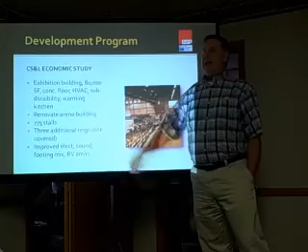So the analysis phase, if you'll go through this. We started with the economic study, as you recall, an 80,000 square foot concrete floor exhibition building, pretty large building. We need to renovate the existing arena building and have at least 775 stalls available for a typical large horse show. The Morgan Horse Show is an exception, since in previous years they've had 1,400 stalls. This year they've got 1,300 stalls, deciding to make it a little smaller by design.

We need to add three additional rings on top of the existing ones, one of them being a covered ring, and we need to make several infrastructure improvements. As you know, the whole site is very old and needs a lot of work.

Another thing the study said was that in 2005, direct annual spending in this area because of the annual events here will grow from $15.5 million to $35 million. Local hotel tax revenue, more than twice as much, from $67,000 to $140,000, and state revenue tax should grow from $490,000 to $1 million.

What is direct spending on? People buying food, gas, lodging, shopping downtown—just where they're actually spending money. There's also some indirect spending left out of that; that's just the direct figure. This building is going to be on the other side across the path. Yeah, we'll get to that. I want to try to get through all the analysis part quickly here.

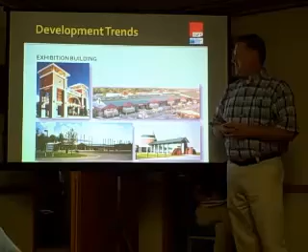Of course, we're in a floodplain, I don't know how good it is. You might have some coastal issues that bring people inland for emergencies from a hurricane or something like that. And once the water goes away, then you can bring them in.

Another one: they're multi-purpose barns, and they're multi-purpose because the trend we're seeing is that portable stalling systems, not permanent stalling systems, are going in. It gives the grounds the most flexibility.

In fact, here, which is very typical, they would remove all of the stalling in all of the barns, stack up the materials, and then in the winter sell that space to store RVs, campers, and boats and things like that, and have an income for a period during snow and inclement weather that they normally would not be able to use the spaces for. So it's a good money generator.

Let's go to the next one. Another thing we see is theming up the entire grounds, especially creating some kind of gate-like entrances to identify where people are supposed to flow into the site. And some identifying markers that create a theme or an image for the site, like the use of towers somewhere to either draw people to it or make the site visible from a long distance.

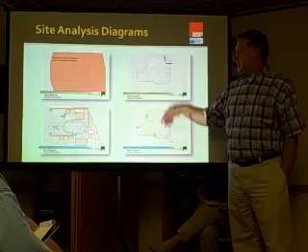How the site functions with the fair and without the fair, in terms of people getting on and into the site, pedestrians, cars, parking, and how they flow once they get on the site. How do you service it once it's loaded up?

What's the existing design alignment of it? What do the buildings look like? What are the fair use zones?

And then what are the multiple non-fair uses, the Paradise City Arts Festival, where do people go, park, shows exist, how does the New England Morgan Horse Show set up?

And then what are the opportunities, strengths and issues of the site? There are several, but among them are that the site floods, and stormwater management is a big issue. The whole site is very old and deteriorating, and has had deferred maintenance for a long time.

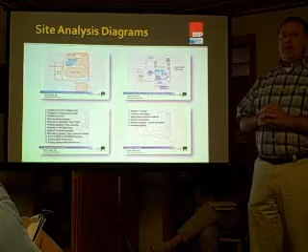And there are some code issues, and it's tough to get to the site if you don't know where you're going, because the signage is lacking, although you can see the site from the interstate.

So what we did was, as I told you, we went away and developed a bunch of alternatives, and came and presented those to the development group and the fair board. In these alternatives we took each one, analyzed it, wrote down the pros and cons, and showed how each could be used. What both agreed to was this alternative 3.

This is not the final master plan, but in this plan the exhibition building is over here by the interstate. What we were asked to do was look at moving that building down this way, because we have a large area that could be developed as a parking lot.

One of the things we looked at was how parking works and where people can get into the buildings. What we're talking about is just right up here by this building. So let's go to the next image.

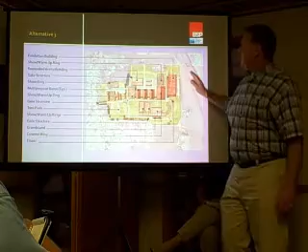With Route 9 and that—could you orient us on that? Yes, I'm sorry, I apologize, I should have done that. Here's the interstate, here is Route 9 coming in, this is Old Ferry Road, this is Fair Street, this is the administration building where we are, and this is the existing arena building.

Okay, all right, so let's move on because this was just one step. Some people just got in here. Can we just see the map for a second more?

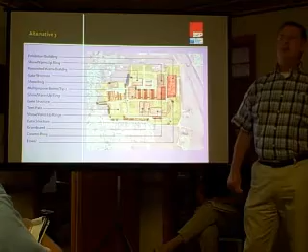More over there? There's a chair here. We got a couple of seats over here. There's one over here now. Plenty over there though, a couple over here. Move, you can almost see. Sorry, we've been doing that all night. You want to sit over here?

If we had used the exhibition building, it does have meeting space in it, bigger than this, that the Morgan Horse folks would not be using at the moment, so this could have worked. It was tough getting it.

All right, so we went back home with the instructions to improve that plan I just showed you. There were reasons why they didn't like the other plan. So we said, well, we'll try and solve those problems and make sure we've done our job completely. So let's go to that.

So we took that plan and shifted it down as we were instructed to, and looked at redeveloping it. We looked at placing the building over to the west side, keeping the red stripe zone that you see there as a parking area that also is where the carnival sets up during the fair.

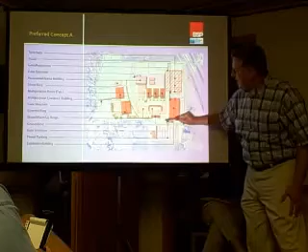I'm going to show you a 3D view of the site, so it'll make a little more sense when I get to that. I just like to tease you a lot while I'm doing this.

So what we were instructed to do with this plan was go refine the master plan. There were some things architecturally we wanted to do to the building, so we went ahead and took it. We'll go ahead and move on to the actual master plan. This is it—it's almost identical, with some minor revisions, but this is the way it generally lays out.

Improve 3 lanes along this road. The existing gate remains that goes in past the arena building. There's a gate here, but we developed a new gate structure and restroom building that provides a main pedestrian spine through the site. We have an exhibition building here, paved parking here, gravel lot here, and reorganized rings for the new grandstand. Is the old grandstand being torn down? Yes, and I'll just go ahead and talk about that.

The existing old grandstand is basically an original grandstand that was moved to the side, was rotting, was rebuilt, added to on both sides, a new roof was put on it, and it just kept being cobbled together. Right now it is so far from meeting any type of fire safety code or ADA code that it would be cheaper just to rebuild a new one under new guidelines.

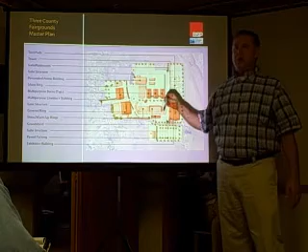So we have 3 new horse barn structures. We've identified, because part of the program for the fair was to say that they could set up 175 or more stalls, but that they wanted to have permanent buildings that could hold at least 550 stalls. So we have 3 100-stall barns that have wash racks, restrooms, and office space in them.

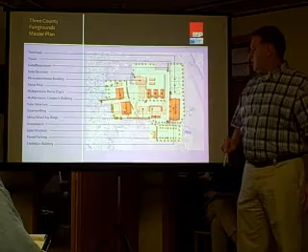We have 1 large multi-purpose livestock building that replaces all that old dairy barn stuff that's very inefficient and dangerous. We have a covered ring that has bleacher seating, and then it has restrooms and concession space underneath it. We have various rings scattered around that sometimes are warm-up rings, sometimes they are actually show rings, depending on who's using them and what they want them for. Of course, the existing arena building and the existing 2 Morgan horse barns, and the existing maintenance building.

You said they needed 550 and you have 300 in those 3 buildings? I have 300 here, about 220 to 230 over here, and then we can install in a couple of these other buildings if we need to. We exceeded the requirements for a permanent building, and when you put in the 3 barns, you can get almost a little over 800 on site. Now the Morgan Horse people need 1,400, and we did a special layout for them to show them where they could put tents. We'll get to that in just a minute.

There's a pedestrian gate that's used only during the fair here, but we propose improving it, putting a nice gate structure in there. So we have a gate structure here, here, here, and here.

Where would the amusement company be? They would set up on this gravel lot. They would be in the parking back. Yes, and I'll show you that in just a minute. I'm gonna get to that.

The 3 rings, you said there were 3. Oh, 3 new rings. Right. They wanted to increase the rings from 5 to 8. There are 8 shown on here. There's 1, which is existing ring building, 2, the covered ring, 1 which needed to be covered. So here's that. 3, 4, 5, 6, now 7, and I missed one.

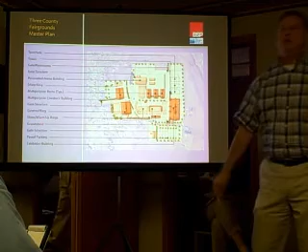Dressage. Thank you. Okay. Yes, sir. So that pedestrian gate remains primarily a pedestrian gate, and it'll probably only be used during the fair, because we have people who filter in from the neighborhood.

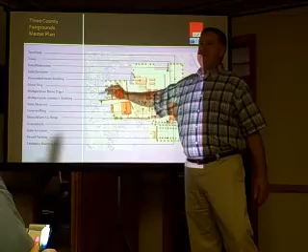The other entrance off of Bridge Street would remain as a service road. Not only used as a main road? No, in fact we're proposing to improve the interchange here, with traffic lights, turn lanes on the road, and then 3 lanes here, 3 lanes up here, so that during a major event you can have 2 lanes in and 1 out, and then switch it over to 2 out during those major events.

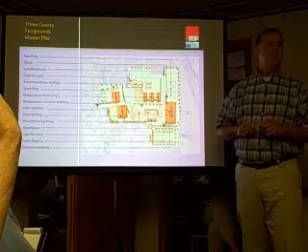Are you gonna talk about the decision to replace grass lawns for parking with both concrete and gravel? It seems like that will keep the area... You mean asphalt? The asphalt over at the lower one, and then up there where you're doing the fair, turning that into gravel -- isn't that going to keep the area up some and take away some of the beauty when people aren't using it?

It will, I agree with you, but the issue here is that we're on a very wet site that's in a floodplain, and it makes the site unusable.

The Morgan Horse Show is okay with it, not real happy, but they're used to getting dirty. But when there's an event like the Paradise City Arts Festival, and people are trying to get through this parking lot in high heels, it does not work, and that show does poorly in those years. So it's a big issue, and on top of that we're cramming a lot of event space in here that we're making multi-usable.

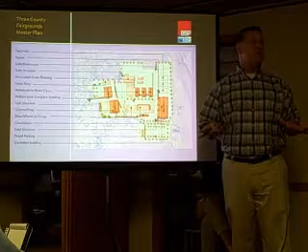We actually are going to be parking on the show rings because it's a hard enough surface that we can pack down and park on to maximize our utilization of the property. When I get into that, you'll see we use every inch of this property.

Was there other kind of material you could use instead of concrete that would take care of the muddy problem? There are some alternatives. There's Grasscrete, a product where you set up the concrete pattern, backfill it with gravel, and then sow it with seed. It makes it structurally sound, but that's very expensive, and there's also drainage issues, so you might consider asphalt instead. But at this level, all I've done is identify the areas and generally what the materials need to be. I'm not getting into construction documents or details like that.

What about traffic on Bridge Street? How would that impact the traffic that's already there?

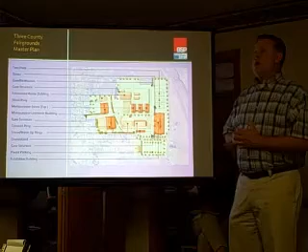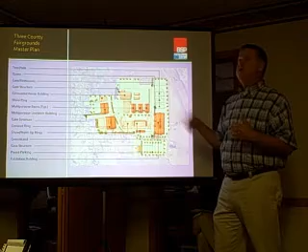One of the things we talked about is that this is a dangerous intersection with a lot of residential nearby, so we were trying to keep the maximum amount of traffic over here as possible. We also talked about not wanting people to stack on Bridge Street waiting to load in. Rather, we'd bring them all the way into the site and stack them on these roads temporarily while we're loading the parking areas, getting them off Bridge Street. We don't want to create safety issues or access issues for local people, and that's why we're talking about the 3 lanes and other things.

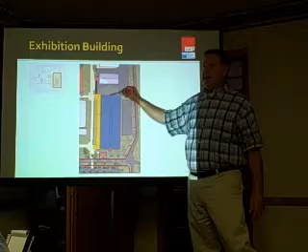Let me go on to the next diagram so we can start showing more detail. This is the exhibition building — if you'll hit it one more time, it shows there are actually 2 access points into the building, and this is the public corridor spine with access to the main exhibition space, which is a high bay, concrete floor volume with no columns, that can be subdivided into 2 or 3 smaller areas.

On the front piece of this building is the support space, which includes the fair office, a couple of pairs of restrooms at either end, storage facilities, and breakout meeting rooms. We planned for about 5 meeting rooms, a little bit larger than this.

The way it functions is that if you have one big event, you park everywhere on the grounds and enter through the 2 areas. If you have 2 separate events going on, you put the divider wall in, park one group on this lot and bring them in this entrance, and park the other on this lot and bring them in the other entrance. So there's a lot of flexibility in the way it gets set up.

The next diagram is just a little more detail of the multi-purpose horse barns. These can be set up with banks of back-to-back and on the end 10 by 10 stalls, and the yellow represents the corridor that services them. But when those stalls are taken down, it's just one big clear space that can be used for storage or other events or expositions, whatever it's needed for.

There's a little bathroom building right there, by the way. And then this is the reworked inner lawn area where the existing racetrack now comes way out here and wraps all the way back over here. This is what's required for a tractor pull — that's a 400-foot segment for a tractor pull. The new show ring — although there's a line shown here, what it really does is this is the new show ring, and it comes all the way down to here.

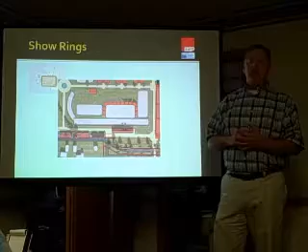Fencing can be moved, gates can be put in where they need to be used. Part of the Morgan Horse Show uses this space over here. And then we've got either a warm-up ring or show rings, whatever they need to be.

The next diagram focuses in on the open-sided ring, and it has in it the actual ring, the bleachers looking on the ring, and then the concessions, restroom, and office spaces going down. So basically, you come in, you either buy concessions or go to the restroom, and you come in the middle and go into the bleacher area.

All open-sided. Typically we'll have an 8-foot wall along this edge to block the lower view in case there's activity out here, but we like it open so there's a lot of breeze.

And if you look, we've oriented all the buildings in a north-south orientation so that the solar orientation is good for this type of building, because that's one of the green things we were trying to accomplish. And also, because these are open and we want to have a lot of natural ventilation, we have a ridge along the top of them to allow the ventilation to take place.

So just out of curiosity, how is the north-south facing good for those buildings if they're open buildings?

Well, because of the way that we have the seating, as the sun sets in the west, for example, in this case, the sun is behind everybody in the interior building, which is a full height building space right here that blocks that western sun. Morning sun's not so much a problem.

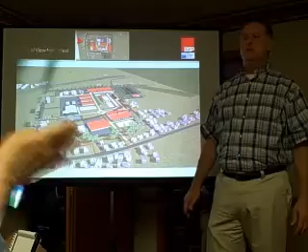Is there any place you could set up a stage, an outdoor stage, and have just standing room in front of it? Sure, yes, there is. In fact, we talked about that, and I'll show you where that is on the fair side. I'll show you an example.

Now, this aerial view that you're looking at is looking from the west across the site towards the interstate. So here's where we are right now in the administration building. This is the existing arena building. This is the existing Morgan horse barns. You can see Old Ferry as it pops underneath the interstate there, and you see Fair Street here. And again, we're looking at the interchange and improving this, hopefully to 3 lanes the whole length of it.

And all that will come off of the city side. I know that question's going to come up.

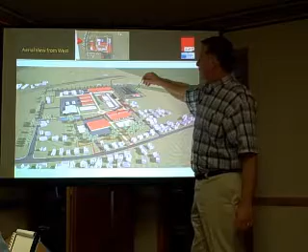So generally, as people approach and come into the site, you can peel off and park over here, or peel off and park here. There rarely are tents set up here. Mostly this is a parking lot where you can bring people around and start loading the parking lot over here. This is where the carnival event sets up, in the back, right there, away from the Interstate noise.

Yes, that's right. We have a tower feature that acts as a focal point so you can see where you are within the entire site. Of course, this is the covered ring. This is the livestock building, the horse barns, the exhibition building, and then there's the grandstand and existing track.

Moving the site around, I'm going to show you views all the way around the site. This is looking at the site from above the cemetery in a northeasterly direction. And again, you can see the exhibition building right over here with the paved parking lot, and the covered ring and the existing arena building.

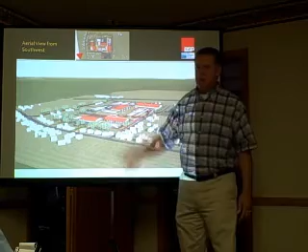Where would be the RV parking for a show like this? It would be around the perimeter on the fence line. A lot of where it is, we're going to add an additional 75 spaces or so to bring it up to about 300. Bruce, was that right?

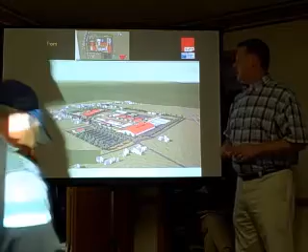What about the playing fields and the parking lot? You're saying the playing fields, on the other side, the city side, where you're gonna increase? Yeah, that's right. It doesn't... the master planner here knows that.

We talked about all the street widening and sidewalks and things happening in the right of way of the street itself. So there'll be a city sidewalk put on both sides of Old Ferry, and on the Fair Street side. But isn't that where the 3 lanes are gonna go in? There's room to do all of that, and you'll see a picture of it in just a moment.

So when the games are taking place and all these events are happening, there'll be a lot of traffic there, right? There's gonna be a lot of traffic coming into and leaving the site. Well, there is today, parents coming in and out, plus everyone else. If you considered that, I'm assuming you have considered that traffic.

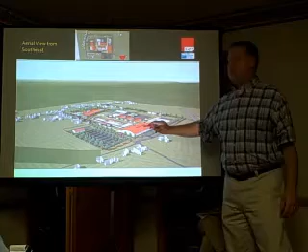Now, a lot of the additional events that take place on the grounds - and I think we talked about this a little bit - proposed in the CSL study is winter use of this building right here, to make it more year-round. So we're accommodating the existing warm weather month facilities, but we're adding a lot more events in the winter when there's no traffic from those other events.

What about a bike lane on the perimeter roads? You're out of luck. With 3 lanes, I'm not sure there will be room. Did you hear that answer? No. With 3 lanes, there may not be room within the existing right of way.

There gonna be sidewalks there also? Yes, this is cross path back here. The cross path is such a narrow little road. It's proposed to be widened - it's gonna be widened, and it's a real near-triangle congestion area with a lot of traffic. But the proposed improvements hopefully will make it function better.

Could be a dangerous intersection. The fence currently along Washington Road - will that go away, is that correct? No, we will maintain that fence. Well, there's a piece of it here that we'll probably get rid of on this end. We'll need to have fencing over here to link in around this lot. So the northern end of it would still have fencing.

I know I come and go to my home on Little Road through here, and you probably splash through that water spot like I did, very slowly. Yeah, but when there's any event, there's a lot of traffic, it really is congested coming in there, and also for emergency vehicles. Well, that's part of what we were considering, why the 3-lane might be better, because we could open up a lane.

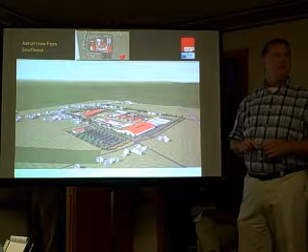There's a sidewalk on the fair side. On the back road across there, I don't think we planned for anything. There's no lighting or anything back there now.

Are all your utilities going to be underground, except obviously for the lights that have to be above ground? I think that's generally the idea.

Everything is good. What's that? Oh, okay. Oh, thank you. You went ahead and leaned on it, fell asleep apparently.

This is a view from the southwest, looking above the interstate towards the site. Again, here's the exhibition building. This is the office. Here's the existing arena, and you would come in to go to that existing arena in the Morgan Horse Farms.

The playing field is just to the right of it. Here's all the existing playing fields. The city bought an additional piece of property to add another field, so that's underway.

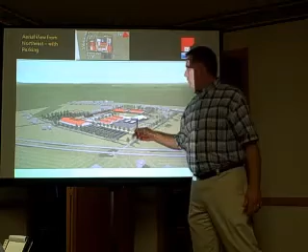This is normally going to be an open lot, used for parking for a major event here, or sometimes over here. Moving around the site, getting down on the interstate, this is it set up with tents, the next one's with typical parking, and then looking at it from the northwest, here is a view of the street with the sidewalks on it.

It's looking south on the field. Yes, playing field south, over this way.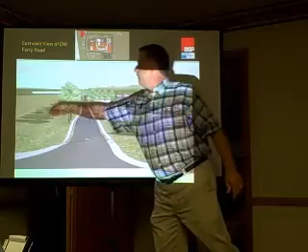All the fields are over here, and the park sign is right there. What kind of trees are you planting? Green ones. I don't know, we've just identified that—actually these are existing, aren't they? Yeah, those are existing. We just identified that we want certain trees for certain reasons.

So your 3-lane road only goes down, what, 75 feet? Well, that's what we initially priced, but in further discussions we've been told it'd probably be a good idea to look at putting in 3 lanes the entire length. We don't disagree with it, it's just another $1 million.

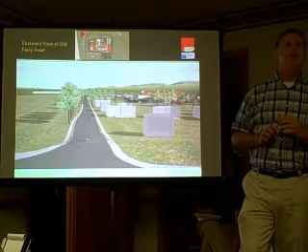Sure, that's all. I saw a tentative hand go up, yes. Sure, well, I didn't mean to get into this, but when do you guys talk about trees?

Do we have to talk about trees now? You want to talk to a landscape architect about trees? The realistic answer is, when this gets to a point where there's actual drawings being done that are definitive of grading, drainage, planting, all of that, when someone's proposing an actual building, the building plans come before the planning board, and there'll be a planning board hearing at which time all of the really finite issues get talked about.

And when could we also talk about renewable energies in this plan? Same thing. Okay, thank you.

Did you say the midway would be set up in the parking area adjacent to the exhibition hall? Yes, and I'll show you a diagram that shows that.

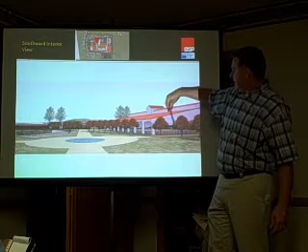This last view is looking southward from the arena building, as if you're standing by the arena building, looking towards the existing exhibition building and the existing museum building. You can see where we shortened the track way back and built the open-sided arena building. You can actually see the bleachers inside the building, and the ring that's in there.

Is that where concerts might be occasionally? Well, I don't know what programs are going to be there. Someone's just asking, can you have a concert in there? And I said yes. And she said, well how many can you seat? I was guessing, the bleachers hold 1,000, you could probably set up another 1,200, so it'd be 2,200.

I guess a question, how much of the existing facility would be demolished, and then how much in percentage would be new construction?

It's easier to tell you what we're keeping. Basically, when the fair office moves out of this building, it just maintains itself as a maintenance facility. This used to be an actual dairy barn, so they just built inside the dairy barn.

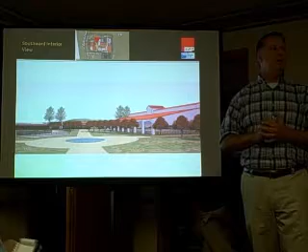This building remains. All of these little exhibit buildings along Fair Street remain, and the arena building remains. Everything else, including the Morgan Horse Farms, gets replaced or removed.

The existing restrooms we keep are the ones in the middle. As for the proposed cost of the project, the total cost of everything here, including all the infrastructure and some off-site improvements like roadways, is roughly $40 million.

But it's a multi-phase development. It's not just the study—this is a full master plan. And this is how much money? You didn't bring your checkbook tonight?

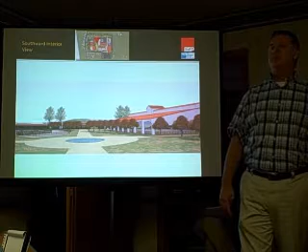Multiple sources are being looked into for funding. The time span can vary depending on how quickly it can be funded—this could be a 10, 15 year process. But let's talk about the phasing of it by going through how the site gets used, and when I get back to the full master plan, I'll talk about how it can be developed.

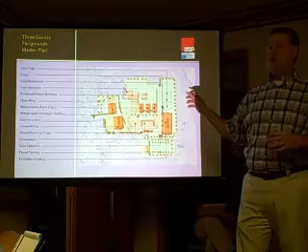Could some of the grandstand and maybe a couple of the stable buildings be replicated to maintain that look, as they are now? Yes, exactly. One of the things we talked about was that even though the grandstands have been cobbled together, there's a certain look to it—that arch type on the end, the nice little hood that comes up, the judging piece that sticks out on top. There are some nice things about it, and we'd like to see those replicated to remember the historic look.

Now, we want to improve the look of the buildings. We don't want just simple two-bay deep racehorses, and we want to add that ridge vent because we need to get airflow circulation moving on all those open, un-air-conditioned buildings. So there are functional reasons why we need to do that.

Let me show you the uses of the site, and then I'll come back and talk about one way we can look at phasing it in.

This is the way the fair would use the site. They would set up the midway in the northeast corner near the interstate. The beige/orangey color represents general parking areas. The yellow represents pedestrian circulation and eating areas. The pink represents entertainment—the demolition derby setup and the tractor pull. The dark purple represents some entertainment pieces, stages and outdoor stages, and some children's areas, away from the midway. In fact, we've got the midway away from the livestock activities on this end of the site.

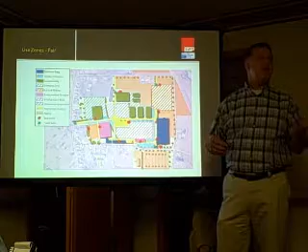We have the show ring, the open-sided ring, which could be used for multiple things—a horse show or some small venue entertainment, depending on the need and the day. It'll just be a flex space. We're actually parking on some of the rings, and this is the whole livestock component, with various size animals set up in here.

Then as the horses come in for their day, they might use some of this space. Exhibitions will be going on inside the building. The light blue represents outdoor exhibition space and meetings. For the Morgan Horse Show, we've identified multiple sites for tents that work well for them, providing 1,500 to 1,600 or so stalls, which allows them room for growth.

One thing I failed to mention on the previous plan is we've identified the gates in blue and the restrooms in red. There are actually restrooms in this building that can be opened up. For the Morgan Horse Show, because this is a nicer space and they have a tendency to track things in, we might not let them use the restrooms in this building.

But at the same time, they set up a tent that is a food tent, and we might allow them to come into this building, at one end, and use it for that piece. It just depends on the agreement. Do they need less parking than other events, because you're taking away a lot of their parking?

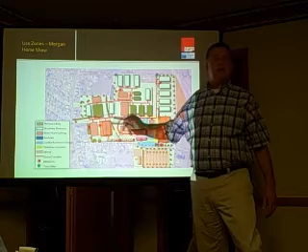The ring in the upper left-hand corner near Bridge Street, what's surrounding it, what's the ring made of? Is it still grass? It's stone dust, and there's an existing ring there, but it's surrounded by grass now. It looks like it would be surrounded by concrete, or trees? No, that's not concrete.

I'm sorry, there's not even any concrete proposed on site. What is hard pavement is asphalt. The rest of it, most of it, is stone gravel. The ring itself is stone dust, and everything in white around it is grass.

Well, there's some stone dust over here too. The previous one, the actual master plan, shows it a little bit better. We'll get to that at the end of this sequence.

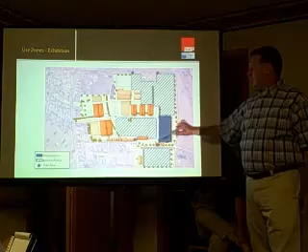Okay, go to the next one. This is an example of how you set up for a major event. Conservatively, we figured there needed to be about 17.8, 18 acres worth of parking for a major exhibition in this building. Traffic comes in and enters at multiple sites to load in quickly, and then the show goes on. Yes ma'am, and sorry, we already touched this, but how many people can fit into that building?

We made an assumption, and I can't remember the exact occupancy number, but I can tell you what we did. We said there's 80,000 square feet of show space in it. The range of occupancy for setting up like this, if done safely, is 7 square feet per person. If you set up banquet tables, round banquet style, it's 15 square feet per person. So we used 12.5 as an average to calculate the occupancy.

By code, we are to provide 1 parking space per 3 people, and you can park about 120 cars per acre, so I calculated 17.8 acres. I ran those numbers together, and that's how we do it all over the country.

In general, so you don't know how many people exactly. I don't remember. You could just divide by 18,000. I did run a number, but I don't remember what it is. I could do it backwards if you give me a calculator, that's the best I can offer.

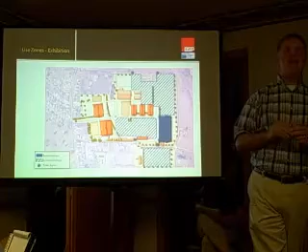Okay, so this is an exhibition, let's go to the next one. Multi-use, and it's very important for this type of facility to have more than one event on the site at a time, so we loaded it up to show how you handle multiple events on the site.

The fair board, as managers of the site, are concerned about how to take care of multiple events on site. What do we do? So from a design standpoint, we loaded it up and said, this is what you would have to do.

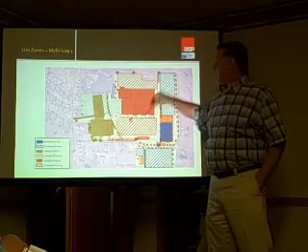We're showing a partial show that's not using the whole building because we don't have enough parking to fill the building. We've also got an equine event going on in the arena, using the new barns and outdoor show ring, and possibly some of the outdoor space over here. Then we show a livestock event with the associated parking. The parking areas are calculated based off of the occupancy of the guests.

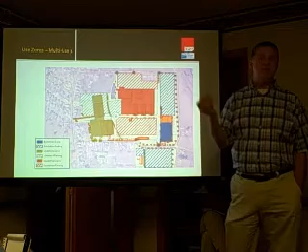So what do you do in this case? We color-coded it so you can see when you have an event here and you're parking people here, you bring them in for the livestock show and direct them into these parking areas. For the equine, you direct them to the guest lot or send them around to the show lot. During the exhibition in the building, you can park here or as this gets blocked or fills up. That's another reason why we like the 3-lane. Let's say this lot's not full, but it's starting to back up because they're having trouble loading it. Close this gate and send them around to the next one, to keep traffic moving. That's the whole point.

It's all about management of the vehicles, so then you can load it up that way. We did another view where we rearranged things and thought of different ways of using the site. We did this for all the previous attempts of design, the alternatives and then the refined ones, and we went through this whole process for each one to help the groups make the decision to pick the site they picked.

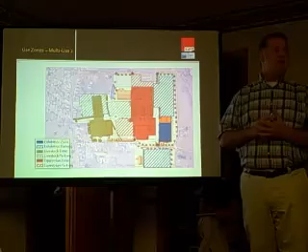And we talked a lot about a lot of issues. So let's go to the plan. Can I ask a question about... Well, I'm going to do questions now, so that I was trying to get here so I could answer the questions. Okay, so what's your question?

About 6,600, well it's kind of a projection type of thing. You know, with peak oil and with gas being as expensive as it is, with people buying smaller and smaller cars hopefully, and with more public transportation hopefully, and more people using bicycles and that sort of thing, was that at all a consideration when we went into this whole thing about parking, how much parking you would need, and how would that change your plan?

It wasn't, and the reason why is because in the 70s we did make the mistake of starting to size down parking spaces, and we've regretted it ever since. There are garages that are practically not usable now. They will be usable in the fairly near future, but by then they'll have to be replaced because they've deteriorated so far. Parking lots had to be redesigned because a lot of subcompact spaces were developed where you couldn't get the larger vehicles in. There's always going to be larger vehicles that need to access the space, and for a facility like this, you're going to have tractor trailers and people pulling trailers coming in here a lot.

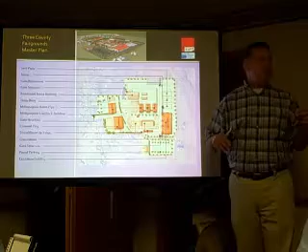You just said the site is smaller than you would like it to be. Why is that, and what size do you think it should be for the uses? For this type of facility, comparable ones across the United States would have almost 100 acres, and we're working with 50, or 55. That's part of why during the really major events the Fair Board has to lease property adjacent for parking.

That's the downside. So one thing you see us doing on this site that we would normally not do is park on those show lawns. Typically you don't like to do that, but there are ways to manage it so it can be rolled down flat for parking. In the use zones, as I showed, parking is all in this zone. The idea is we've got the gravel, we'll pack it, and allow parking on the lawns when it's not too wet. If it gets too wet, we just can't park on the lawns.

What are comparable uses on these larger sites? I'm sorry, I came in late to the presentation, but from what I could pull out, it seems like you have space for a large multi-use building, a Morgan Horse Show, and some possible other events, and I'm wondering what's projected to be in the large multi-use building and the other multi-use spaces.

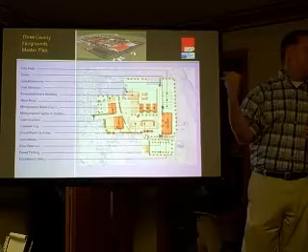That was all predetermined by an economic feasibility study done by Convention Sports and Leisure, CS&L, and we based our entire design off of their economic study. We're planners, not forecasters, but we do have a lot of experience with this type of facility. We understand more of what the needs are to make it flexible, so there are some increases here.

Parallel to Bridge Street, next to the livestock ponds, there's an area that's a grassy strip outside the fences of the fairgrounds. Is that what you're talking about? Yeah, where people sometimes exercise their horses. Right here? Is that going to remain an unfenced grassy area, or is that going to be fenced in now?

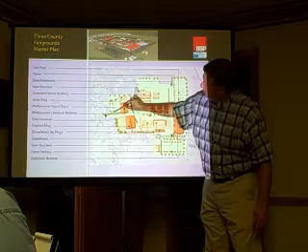I didn't get into that much detail, I'll be honest with you. There's a stream, a little creek bed back there, isn't there? I thought that was there. Is that creek bed on people's properties, or is it just at the edge of the fairgrounds?

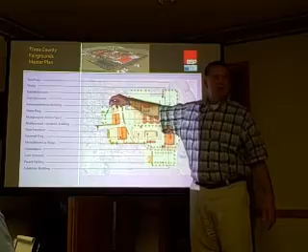But there's a fairly wide strip of grass that's like unofficial parking space that could be used. Right now we're showing it as a grass space with the gravel service road not really extending beyond it. I was curious about the placement of the fence. There's a little buffer there we were trying to maintain. It's a thoroughfare now that takes you off Bridge Street if you're walking — a good way to walk between those two sections.

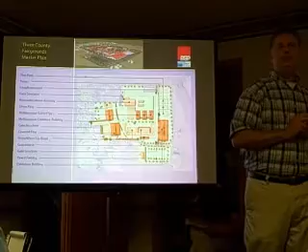So is the elevation of any of the buildings going to be increased — any of the new buildings? Are we going to see what the elevations are? The elevations can't change that much because of compensatory storage, so they'll generally be in the same place they are now. Did I answer that right?

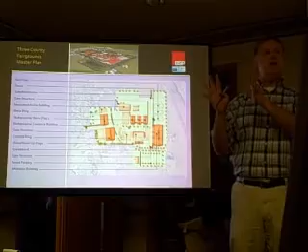So what you're saying is someone did an economic study, and you took that information and maximized the use to fulfill the desire to generate revenue for the city. Is that basically what this is? Generally, yes — we took their economic feasibility study, which said this is what the market demand can handle in terms of size of building, and this is what you need to build, and at what quality.

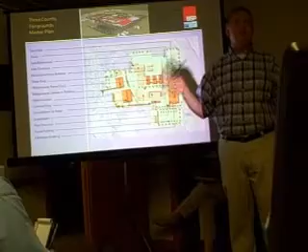We took that information and created that space, but on top of that, the Fair Board had some issues with things that were never addressed in that study, including replacing all of these old livestock dairy barns, the major infrastructure issues, and all the things that made it escalate up to the $40 million total development, in 2008 dollars, that we were talking about. That's not an uncommon number for a facility doing this type of long or short-term improvements.

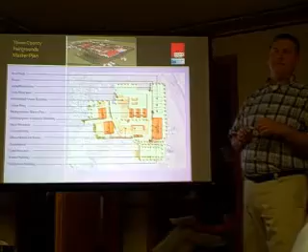Yes sir, so I guess this is a follow-up to a question asked earlier. Another aspect of the changed economic environment we're seeing in the last couple of years, like increasing gas prices, is that the economic factors taken into account in the original assessment of what the city can make and what kind of uses there are going to be in the future, those themselves may have to be reassessed. It's not just a matter of changing.

So from your end, there's the question of how much parking do you need, that's the question asked earlier, but there's also the question of, for example, are people still going to be driving around these massive Morgan horse trailers in the same way 10, 15 years from now? They're the ones with the dough, they'll still be driving. Well, I don't know, the Morgan Horse Show is merely one tenant. I'm just giving an example, or one event. Are people going to be able to afford to utilize this space?

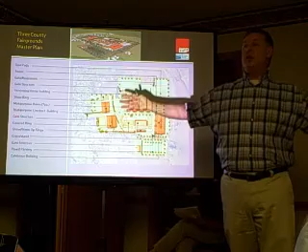I'm just giving an example, it's not about the Morgan Horse Show per se, but it's really a question of whether we need to reevaluate. It may need to be reevaluated, but the study did sort of limit it, saying it was not a huge region that they were taking in. It's really a short region, we're not covering the entire state. I know this isn't your department, it's not that it's not your department, but it seems as if an economic plan or economic factors taken into consideration whatever, 2 years ago, might actually be very different even today.

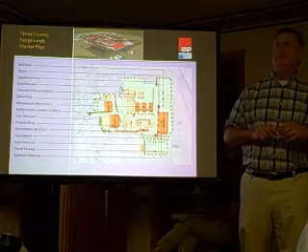And that will be a question for CSNL, because there are some other questions that the group has for them anyway.

Do you have a prioritized phasing as budget comes in? There's a little bit of one, and I'll tell you what I do know today. This exhibition building, or at least a majority of it, is of prime interest because of the study. If this building needs to go, what the group is hoping is that construction can begin in 2010, which means they're trying to get funding to do the architectural and engineering drawings, get it priced out so it can go to bid so construction can start at that time.

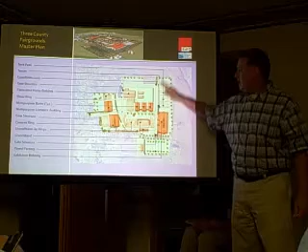When this building goes in, what has to happen is all of the existing barns have to be torn down. If that happens, in order for the fairgrounds to continue to work, please understand the grounds must function the entire time of this construction, 14 to 18 months right here. During that whole time, the site has to continue operating because it has to generate the required revenue to stay open. So what that tells us is these 3 barns had to be built before this is built.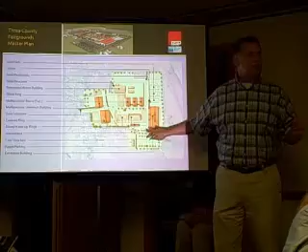These are quick, easy, pre-engineered buildings, the portable pens, a system you can buy from several vendors, so it's not that difficult to do those. From a phasing standpoint, if this is a high priority, prior to the beginning of this project, there's the track that comes along right here. I think the outer fence of the track is about where these buildings are shown. The idea is you could take down the 2 barns that are out here, maybe it's over here.

If you take the 2 barns that are here down, go ahead and take out that part of the track and build these 3 before you ever start getting this other construction. That keeps all of these 3, replacing all of this stuff when it's torn down essentially. So while the construction's going on here for several months, the rest of the site can be used.

Another thing is that this parking lot could be paved right at the beginning of the project, so the displaced parking area could be over here while this construction is going on. So that's kind of what I think you have to do. If this is a high priority, we're probably going to have to do this pretty quick.

The other thing is that a lot of these things here is just moving fences and gravel. So this is stuff that can be done anytime. It can be done next year for relatively minimal money.

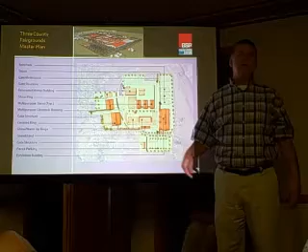What can be done next year? That's the gravel. For example, all this stuff over here could be done. I don't know when it's going to be done, but that's easy, it doesn't affect anything else on the ground. So the idea is that while this construction project is going on, the rest of the site remains active.

Did you do, or are you doing, any of the studies for drainage, the volume that's increasing here, paving, and what are the drains, and where is that drainage going?

Actually, Berkshire Design Group did some preliminary studies for the on-site drainage. They looked at the existing impervious and the proposed impervious surfaces, and looked at the compensatory storage. Actually, all of the buildings have been surveyed for their compensatory storage volume to make sure we can even do this project. Can you believe we did something first, right? I'm amazed with myself, I had nothing to do with it, that was done by other people. But all of this has been looked at in very general terms.

There's some off-site issues that have not been resolved. So what do you do with the stormwater? We have a major blockage up here that's been there for over 25 years. It's an issue we don't know how that's going to get resolved. There was an idea that maybe we could get DOT to allow it to go a different direction, I'm not sure where, but they're not even talking to us about any of that.

So would that be a major financial aspect of this?

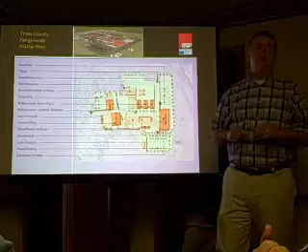Terry Anderson from the city, the DPW and the mayor's office have actually been working on this simultaneously to all the planning that's been going on. The drainage issue in the neighborhood has been a many-year issue, and the DPW has been analyzing all the different solutions to it. Right now, this week, they have contractors out there cleaning out the drain lines and looking at places where they can plug leaks and improve it in its existing condition, and also looking at long-term upgrades to the system. There are lots of different options they're considering. So that is on the table, it's something the city is looking at, and it's a neighborhood issue that has to be addressed.

Both the storm drainage off-site and the roadway improvements would be the city's responsibility, and the fair board would take care of everything on the fair site. But presumably the 18 acres of new parking would be contributing additional stormwater, which would be the responsibility of the city to deal with. No, that's actually not true. Any additional impervious would be compensated for on site, so the amount of water leaving the site would be the same.

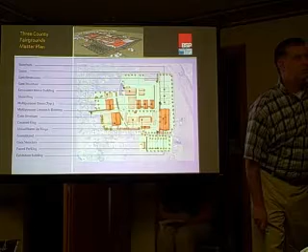I just want to clarify that the off-site improvements are public infrastructure improvements, but they would not be coming from local taxes, we would be applying for grants for those projects.

So that large blue area in the northwest corner is a retention use? That's the existing structure, and we had it highlighted in the plan to show the existing.

The idea is that the new ones would be scattered about the site, along ditch lines in various areas, in any way that we can economically store it, maybe with some improvement. Part of it is that if the off-site improvements can't be made fast enough, maybe there's a way of over-designing the system on-site to overcompensate for the water until it's time to be repaired or taken care of.

Pervious concrete might be a good choice on the site, but it is stormwater storage as well. It could be, but there are some drawbacks in this case because if we're going to have livestock on it, sometimes the manure is one of the worst things to work with. Not only does it smell bad, but it's got a lot of ultra fines and ultra solids in it that do not dissolve. So what do you do with them? You can't flush them, you can't throw them in the river. They're really a big problem.

Yes sir, what about the sewage? We're talking about stormwater, but what about sewage? Can you answer that? Same thing we're doing now with everything. Sewer capacity here is actually okay.

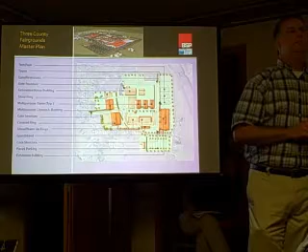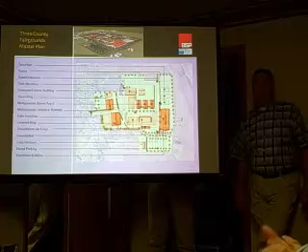Can you say something about the process from here, the next step? First we did the feasibility analysis, and from there we did the master plan. The next phase is to do the business and financial plan - basically take this master plan and figure out the operating analysis to make it function properly and be economically feasible, and how we're going to fund the development of the project and over what period of time that will take place. After that piece is done, and part of that will be more detailed construction cost estimates, and a final engineering design of the property. From there, that would be brought to the city for permitting.

Right now we're in the process of trying to raise the money to do that next phase of the pre-development analysis. We're hoping that we can do that in the next year and get that work underway.

In that next phase, that's when you'll decide who the engineer will be that has to be called. That will be decided as part of the full construction planning phase. There will be a separate architectural and engineering firm hired to do the site, the individual site plan, the detailed site plan, for the Fair Association.

How much would the feasibility study cost? How much did it cost? No, the one you have to get done now - what are we estimating for that, do you know? Well, it includes the business plan, the financing plan, and the construction - it's about 35,000.

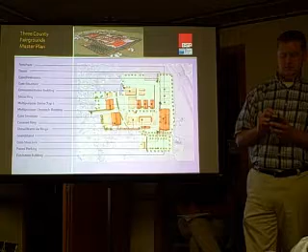And who pays for that? I think it might even be more than that, at least 50,000. And where does that come from? The Fair Board, and possibly grants. The city has been very, very good about helping this process along - they've gotten grants from the state, with the chamber as well, which have paid for much of this work, as well as donations that come in from the Fair Association members who are part of this as well.

Got one more question on the drainage material. I know they're looking at the William Street road drains in the neighborhood. Would that be too small for this site? The William Street road is the right-of-way drainage.

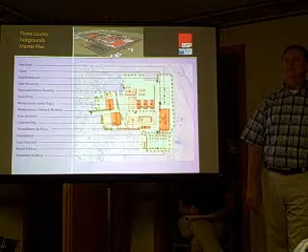If we're looking for grant money to increase the size of it, what if we don't get that grant? Well, that's probably the most expensive route. Right now the DPW is analyzing and trying to evaluate how much of the problem is blockages in the system, how much is because it's undersized, and what are the alternatives. Is there another drainage system we can tap into rather than reconstructing, because that's going to be quite expensive.

So at this point, until we finish cleaning out the system and videotaping it, the DPW won't really have enough information to figure out the best option. It's simultaneous - it's something that has to be done regardless of what happens with the redevelopment. It's a current issue for the neighborhood, so it's an ongoing project for the DPW.

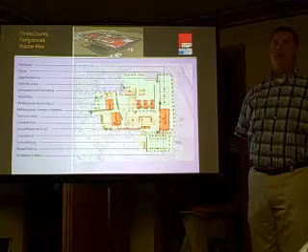Anybody else have any questions for Mr. King? I've got to get out of here in about 10 minutes. Mr. Rutger? Yes, sir, I just want to ask about noise abatement. Have you had any projections of noise or the increased noise, and if so, are you planning to do things that will abate that noise?

We haven't done any type of study as far as that goes, but what we did consider is, for example, we looked at moving the carnival away from the neighborhood. We did choose not to put the building over here - we decided it was too much of a big structure for a lot of residential. So we like the idea of it being visible from the interstate, and the horse barns being visible from the interstate as you come in - we think they're significant and signify what the site is about.

But to get back to the sound, really your big sound generator during the fair is going to be this, and this is already here. There's not going to be any change there.

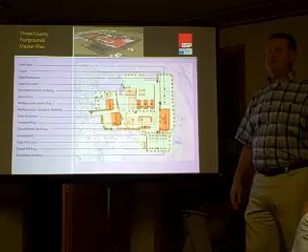Well, we have some unusual wind patterns here that carry noises in unusual ways - it goes this way, it can go this way. But also topographically, the site comes down here, then it's this big expanse, and sound can bounce off this interstate and off this backside and do some pretty hot things, or it can go back and hit the mountains and come back toward you. It goes a long way, you're right. But we've not looked at anything like that.

The other thing I'll say is that some of the uses will now be in covered buildings, and I think that would help with the sound.

And I wanted to say something about the questions that have been coming up about concerts, because the original conceptual vision of how the facility would be used did not include a significant increase in concerts. Really, the vision is to increase the cultural and agricultural shows that are already taking place in the city. So there might be some concerts a few times a year like there are now, but it's not going to be a significant increase. It's not going to become a musical city - it's just not designed for it anyway. We didn't even consider that.

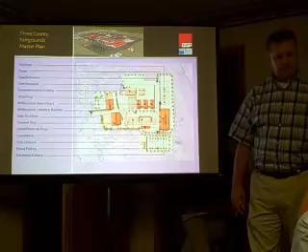You had one more question, sir? Yeah, whereabouts on the master plan would the food vendors be, between the covered ring and the exhibition halls? Do you mean for the fair?

We would have to back up to that diagram, but basically they line all of the main pathways, and they're in between these areas - there's actually a whole zone of them. Somewhere along here there's a bit of a zone. We've identified a large eating area here, a picnic area. Is that all your infield? This is all exhibitor along here, with shows behind it.

Along with the existing farm museum and exhibition - yeah, those are down here, they still remain. We just increased the exhibit space by 80,000 square feet. It's huge.